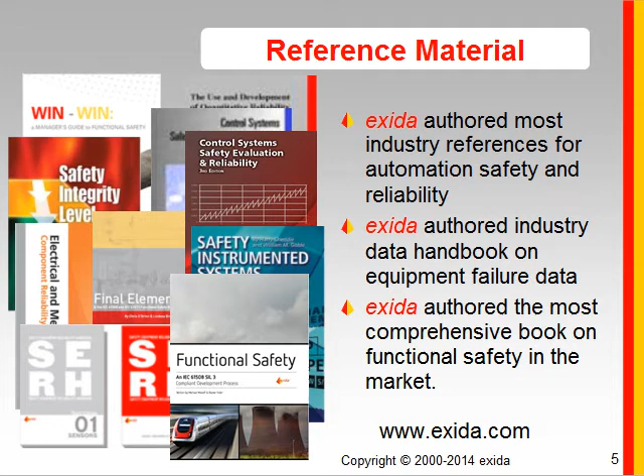I consider IEC 61508 and the process industry specific version, IEC 61511, to be tremendously valuable documents. They were written during the late 90s, to the best of my memory. I do remember attending committee meetings in the mid-90s through the late 90s. I remember attending many committee meetings in 1998, 1999, and the first versions of 61508 were published in 1998. The final versions in 2000, 61511 in 2003. These were tremendously valuable documents to all of us.

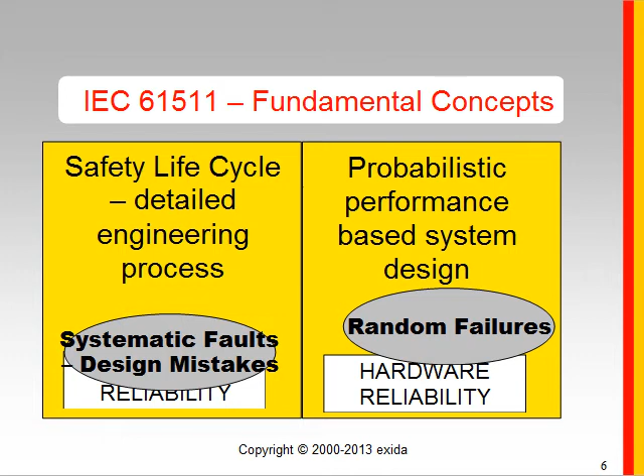These documents are founded on two fundamental principles. A safety life cycle, it's called, a detailed engineering process designed and created to eliminate or reduce design mistakes. A design mistake can cause a dangerous failure. These are called systematic faults. At the same time, we want to eliminate or reduce the chance of random failure, primarily hardware. And a probabilistic performance-based system design concept was adopted to make certain our designs are good enough for random failures. Different mechanisms protect us against systematic faults and failures. The standard deals with both of these fundamentally different kinds of problems, and it does an excellent job.

This safety life cycle at the systems level is a series of steps for the entire life cycle, from analysis through maintenance and decommissioning. The purpose is to reduce design mistakes, increase safety, and lastly, and most important perhaps, to management at least, optimize cost.

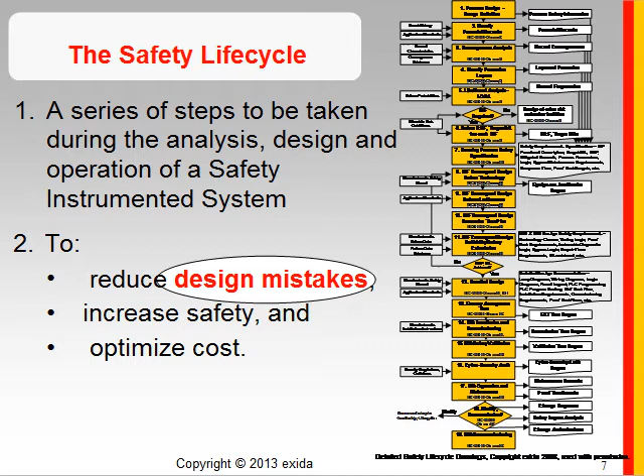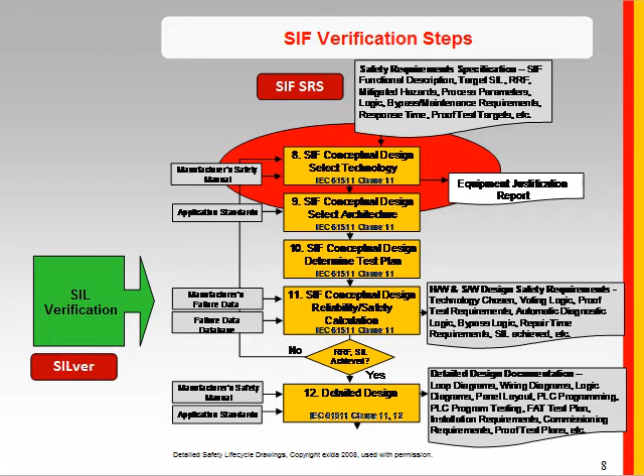Stay tuned. In the middle of the safety life cycle is a set of steps called SIF verification. And you, as a safety instrumented function designer, are free to design the system you want. But you must verify that your design meets the target SIL level. That's SIF verification. How do you do that? Well, there are 3 barriers.

You must make sure all of your equipment has sufficient design quality. That's barrier number 1. Sufficient design quality. Now, how in the world would you know if your equipment has sufficient design quality? That's a metric called systematic capability. And there are ways to do that, including auditing the design process and the testing and so forth. And that's the essence of what we're going to talk about today.

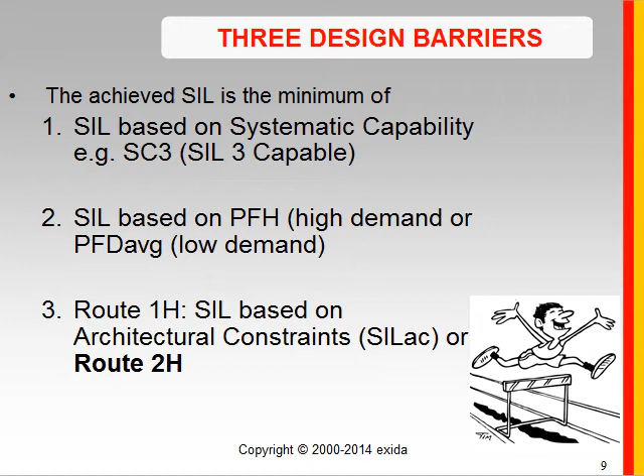Barrier number 2, we calculate probability of failure for the entire safety instrumented function. And barrier number 3, we look at specific architecture constraint limitations. And often minimum levels of redundancy are required based on barrier number 3. So we look at these 3 barriers, and a lot of people have spent a lot of time focusing on barrier number 2, calculating the PFD average or the PFH. Not as many people have spent much time worrying about barrier number 1 or barrier number 3, and we do have a web seminar on all 3 of these. Today we're going to focus on barrier number 1, systematic capability.

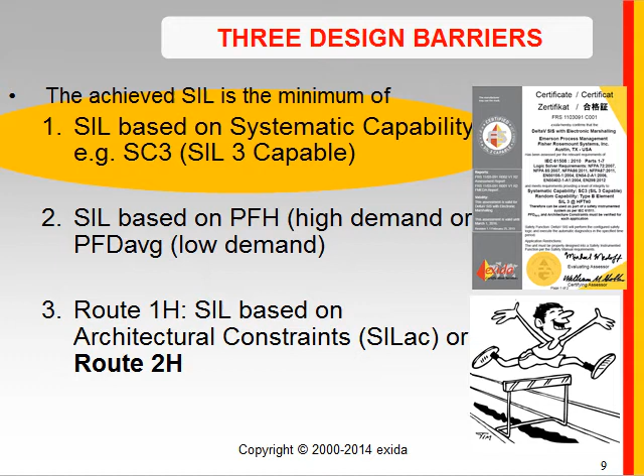One of the best ways, in fact, clearly the best way to evaluate systematic capability is to purchase equipment that has been evaluated for systematic capability by third-party accredited experts. And that is typically known as an IEC 61508 certification.

Systems, products, components, software, and even personnel are getting certified today. The certification varies as a function of the type of product involved, but assessments are done against a set of requirements based primarily on international standards, including primarily IEC 61508. Most certifications are done by a CB, a certification body. And the certification body should establish a scheme which lists all the requirements for certification, both those in a standard and those added beyond the standards.

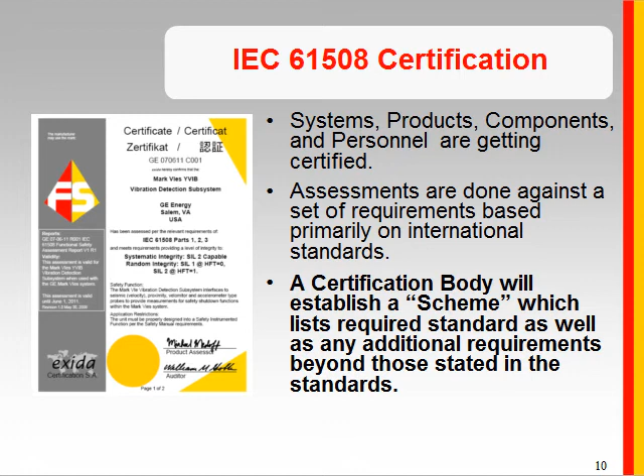Certification scheme. And the benefits of this: hardware. The actual hardware you will be purchasing is studied in detail to identify all possible dangerous failures. And in most cases, the design is changed or upgraded to eliminate or detect many of these dangerous failures. And failure rates are published as a function of failure mode to give you, at least in some certification bodies, really good quality data. And we'll be talking about that later.

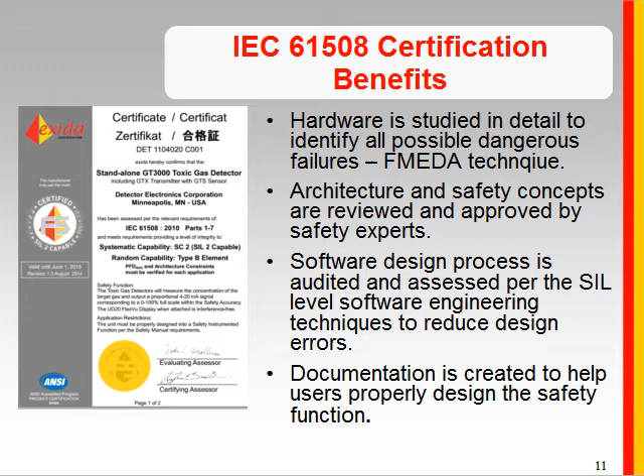The architecture and the safety concepts of each design are reviewed and approved by top safety experts. The software design process is audited and assessed per the SIL level software engineering techniques to reduce software design errors. And that's a tough one. And lastly, documentation is created to help those who purchase a product properly design that product into a safety function. These are all things that are of great value to the systems level designer. And all of these things, if there is sufficient quality and integrity, indicate systematic capability.

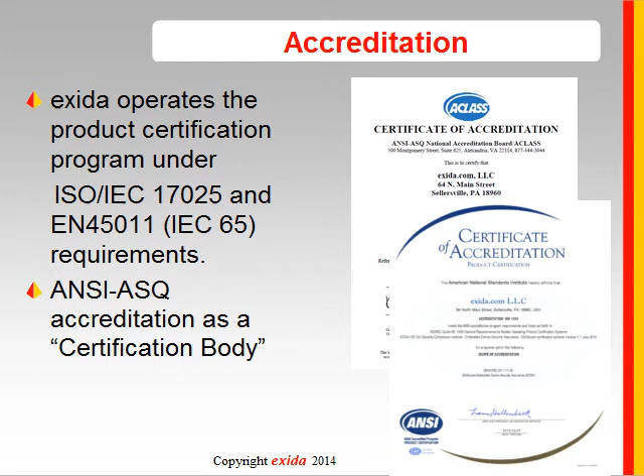It's important that those who evaluate systematic capability be audited and accredited, or in effect certified. A different word is used, accredited. In addition, I mean, who gives an organization the right to issue a certificate? Typically, that's an accreditation body. In the United States, where exida operates the certification program, the accreditation body is ANSI, the American National Standards Institute, and they will audit and accredit organizations, if they pass, to do certifications according to these highly technical standards.

Companies that have an accreditation should confirm the accreditation by putting the AB logo on every certificate. I will admit, exida only started doing that recently after someone commented that we weren't, but that is an important thing, and we'll make sure all our certificates are upgraded shortly.

I got a question. How often is the accreditation revalidated? The answer is every year. Although I'll have to say that it feels like the ANSI auditors are coming in every 6 months. And that's primarily because exida is expanding its scope of operations. We now do cybersecurity and automotive and machine safety. And so we end up having the auditors in here quite often. But at least once a year. Thanks for the question.

Look for the accreditation body logo on each certificate because it's important. Why? Some organizations, even though they are accredited, do not operate under the accredited procedures. I asked them once, why? That's too much work. Oh my goodness. I find that inconceivable. And so we call those a house certificate.

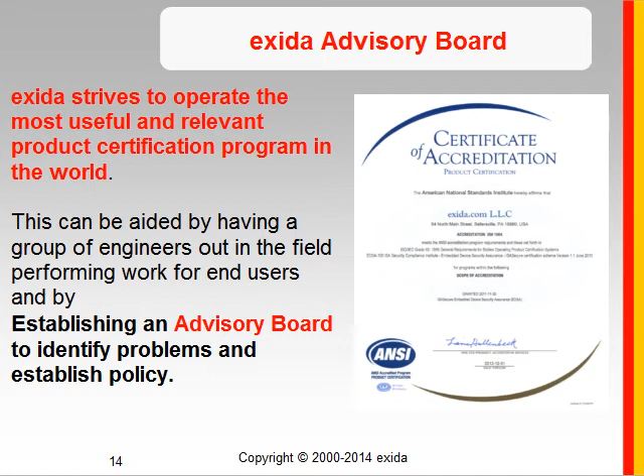Look for the accreditation body logo on the certificates. Every certification body should have an advisory board. This is a group of people who reviews the requirements, the operation, and problems in a certification body. exida has an advisory board, and we use them to help review the requirements we use, to add new requirements, and to deal with complaints and problems of a serious nature.

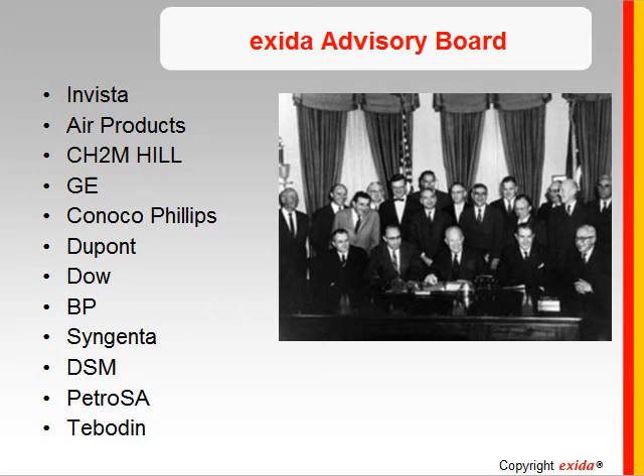Our advisory board is primarily made up of end users and manufacturers from the process industry and machine safety industries. We meet 3 times a year. We do every quarter except the summer. We take the summer off.

The advisory board has established a certification scheme for exida, which goes beyond IEC 61508. In other words, people from engineering companies, from process industries, and from product manufacturers said the world needs a tougher program. And what we've added beyond 61508 is a detailed FMEDA analysis. And I'll be talking a little bit about what this is because we think it's quite valuable.

We analyze and publish not only the dangerous failure rates, like some CBs do, but also the false trip data. I don't know about you, but I've been told by many in the process industries that a false trip is a really big deal. And it's just as important to analyze and evaluate false trip. It's not enough to just publish a PFD number. We must calculate and verify false trip as well. And it can be done. Those who say it can't be done simply don't know how to do it.

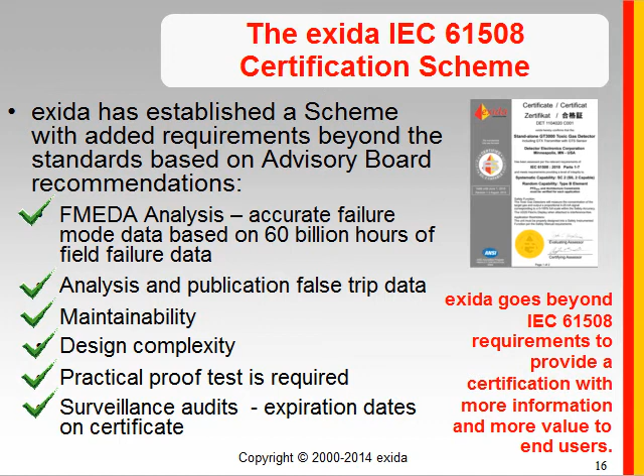We evaluate product maintainability. We evaluate design complexity. And the more complex the design, the deeper you dig in order to verify systematic capability. Exida demands that a practical proof test be created by the designer of a product, at least the outline for a proof test. There are many products on the market that are simply not proof testable, believe it or not. And Exida does surveillance audits and publishes expiration dates on our certificates. I will say that has been copied by other CBs since we started doing it, but that's a good form of compliment.

How's it work? Many pressure transmitters have now been certified by Exida certification. We review the detailed product development process, make sure it meets the required SIL level. We do an FMEDA analysis. Most of the time, that results in manufacturers adding features to the product to make sure data is properly protected in the memory, and adding features to detect program execution problems, and adding automatic diagnostics.

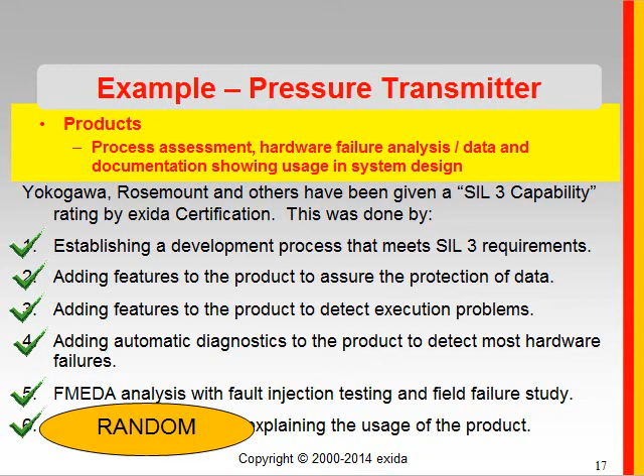What's the bottom line here? You get a much better product, a much safer product, and a product that, well, all indications are, has fewer design defects. And user manuals were created to make sure you have the information you need to properly design. We need to protect against random failures and systematic failures. Please do not hesitate to look at the Safety Automation Equipment list, where all of these certifications are published.

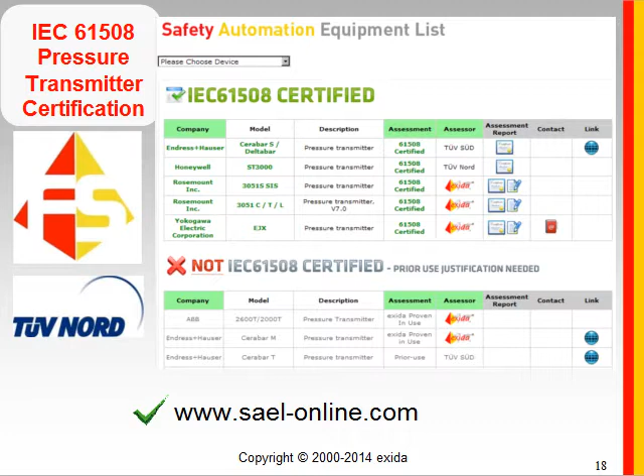The certification concept applies to simple mechanical devices as well, for example, a solenoid valve. We do something very similar. The IEC 61508 standard clearly applies. You establish a hardware development process that meets SIL 3 requirements. We demonstrate test results, make certain they are properly testing to verify the design was done properly. We make certain the user manual has all the information needed for safety design, and we do a detailed failure mode effect and diagnostic analysis. We cover both systematic and random failures.

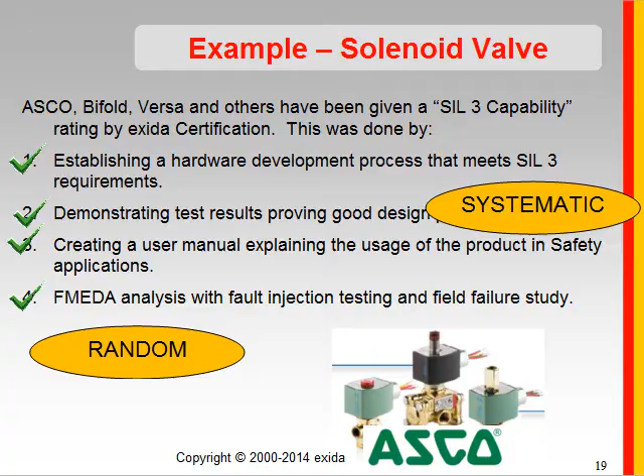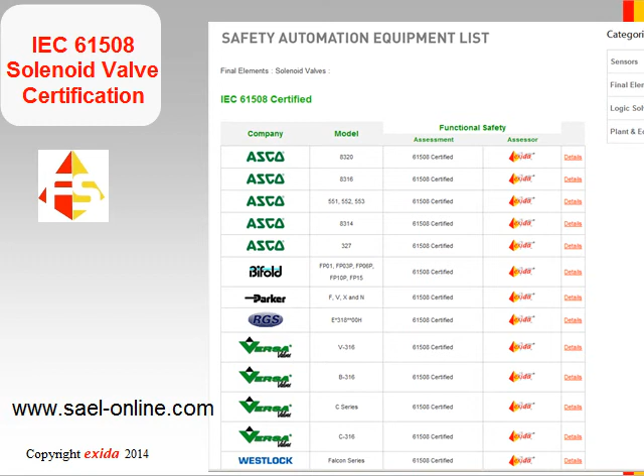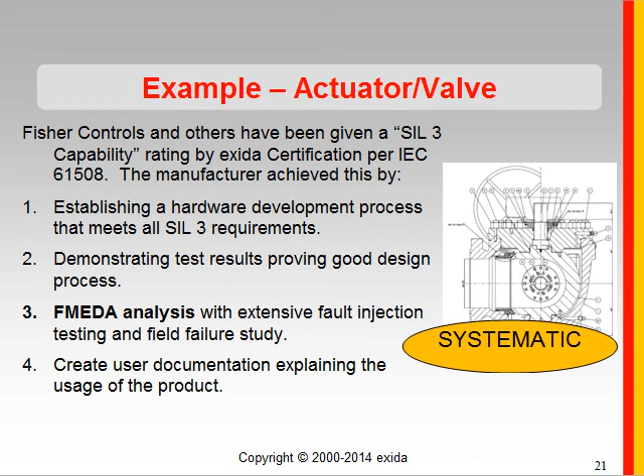And if you look on the Safety Automation Equipment list, which is on the Exida website, you will see a large number of manufacturers now have certified solenoid valves. Even more complicated mechanical devices like actuators and valves follow a similar process, covering both systematic and random failures. Of course, the whole certification process started with logic solvers.

I see a question popped up. This is a good one. Is there a motor interrupt function available with SIL certification? It is a question Exida has been asked before, and I'm so glad you are asking. At this moment, I do not know of any motor interrupt function, final element, a motor contactor, or, quote, motor controller that is SIL certified.

I will tell you that Exida has contacted several manufacturers, and they've all told us, end users don't want certified motor controllers, so we're not going to do it. I guess the bottom line is, if end users want certified motor interrupt controllers, you need to tell the manufacturers to get their products certified. Good luck. I'll be glad to help in any way I can. And if you have any names of people I should contact, please send them to me. And thanks very much for the question. It is relevant. It does seem to be a hole in the certification scheme.

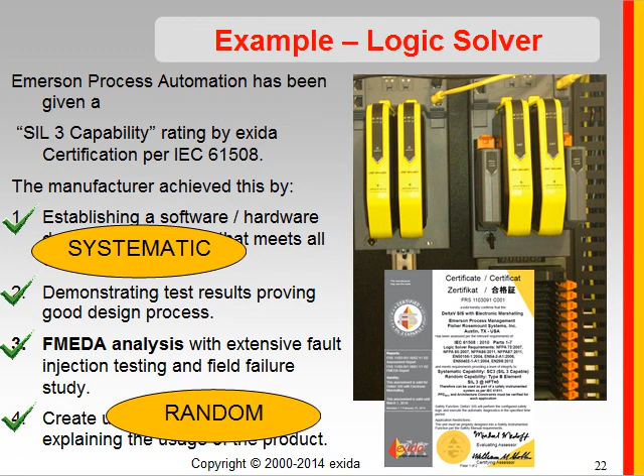We do FMEDA analysis with extensive fault injection testing to verify the diagnostics, and detailed field failure studies of the existing design or prior designs. And the logic solver manufacturers create good documentation, again, doing all that we can to protect against systematic and random failures. Manufacturers who get their products certified have to do a lot of things.

And we check. They have to have a documented life cycle for safety. That means detailed, documented procedures for how to design and test their products, including software. They have to have requirements, detailed written requirements. It's not enough to have it in the head of the chief designer. They need a detailed safety-related test validation plan, we call it. They have to have a defined architecture and design documents.

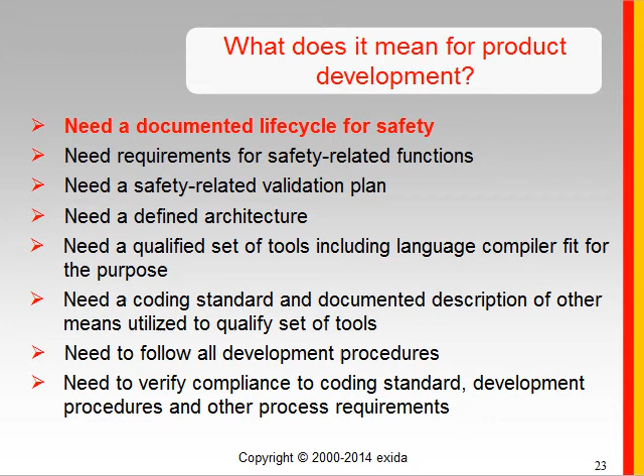They have to qualify their tools, even their mechanical design tools. I have so many stories about problems based on looking at thousands and thousands of field failures. Some of them are caused by the design tools. They have to have a software coding standard and documented descriptions of all the compilers and software development tools they use. They have to follow these development procedures and have evidence that they are really following their procedures. And they need to verify compliance to all their various coding standards and procedures.

At exida, we have a pretty extensive certification process, which is typically more detailed than others, because our advisory board wants a scheme that's tougher. The exida certification process has a lot of details in it. You can see we analyze the hardware, we analyze the software, we provide training to the people to make sure they understand how important safety is. We analyze communication protocols, and we create what's known as a safety case where we identify potential problems. You can look at all the evidence documents that we require.

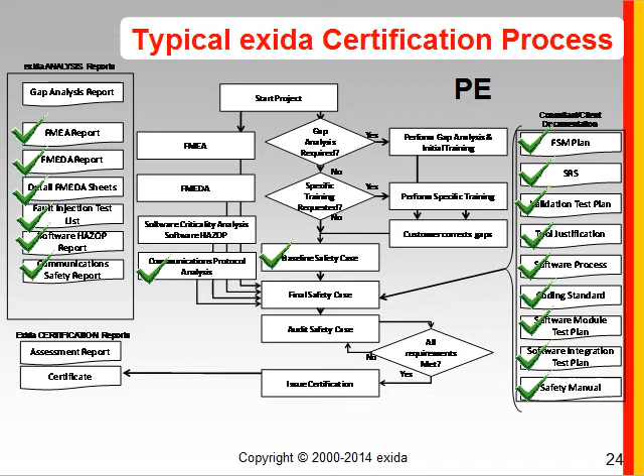Requirements, functional safety management plan, validation test plan, tool justification, software process documents, coding standards, module test plans, module integration plans, and a safety manual. We have to have a detailed failure mode and effects analysis, a detailed failure mode effect and diagnostic analysis, a fault injection test to make sure the FMEDA is validated, the software HAZOP report, and communication safety. These are all the things we need to really do a pretty good job on a smart product.

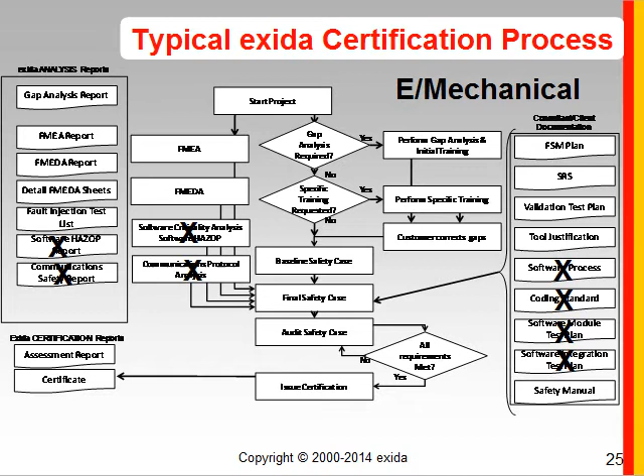Now, obviously, there are many things that are not as involved in simple type A or simple mechanical devices. There's no software in a solenoid valve, nor do we have to check for that. But everything else still applies. And that's how you establish systematic capability, even for a simple mechanical device.

More questions are welcomed at any time. Comments or challenges are also welcomed.

I talked about this FMEDA. It's a process developed by engineers at Exida. Using a component database, we look at each and every part. For example, what happens when this capacitor fails short circuit? What happens when this capacitor fails open circuit? What happens when the input circuit to this integrated circuit fails open, short, or leakage? What happens when this resistor drifts and changes value? We look at every single component and every failure mode of every component.

And you have to ask the question, how does this impact the product? Does the product fail? Does it fail safe? Does it fail dangerously? Is the failure detected by any automatic diagnostic? And that all has to be documented with thousands of lines in the analysis. The question was, are they considered random failures? All of the things I just talked about, these capacitors, resistors, and integrated circuits, are most certainly considered random failures. Most hardware failures, even resistor drift, will likely cause failure of a product. But that is a question we ask during the detailed failure mode and effect analysis. It's very detailed, it's very tedious, and quite frankly, it can be boring, but it's effective.

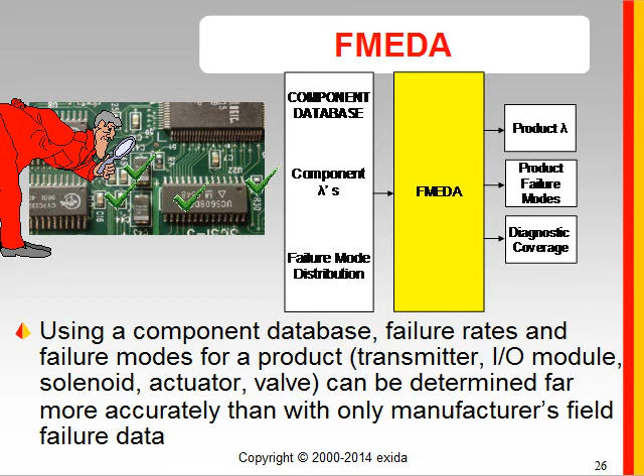And when we're all done, we generate both false trip failure rates and dangerous failure rates, and we can identify failures that are detected by automatic diagnostics and those that aren't. We also identify the useful life of the product based on the useful life of the components. There's unbelievably valuable information that comes out of an FMEDA. But like any method, there is a potential problem. The accuracy of the FMEDA depends on the accuracy of the component database. You've heard the term garbage in, garbage out. The FMEDA process itself is not foolproof and must have a good database.

Another question. Thank you, David. Systematic failure mode, looking at manufacturer's process. Yes, the process analysis is looking for systematic failures of the manufacturer. It's not just the process, the defined process, following the defined process, and testing. Testing is a big part of identifying and mitigating systematic failures in the manufacturer's development process. But the safety life cycle concept, and that translates to the procedures used to design and test a product, are what we look at to identify and, of course, require that manufacturers fix design systematic failures, design mistakes.

Well, if this component database is so important, how do you get a good component database? And the answer is, in any reliability engineering context, you must understand the parameters that affect and might create the failures of the components, and you must have good field failure data.

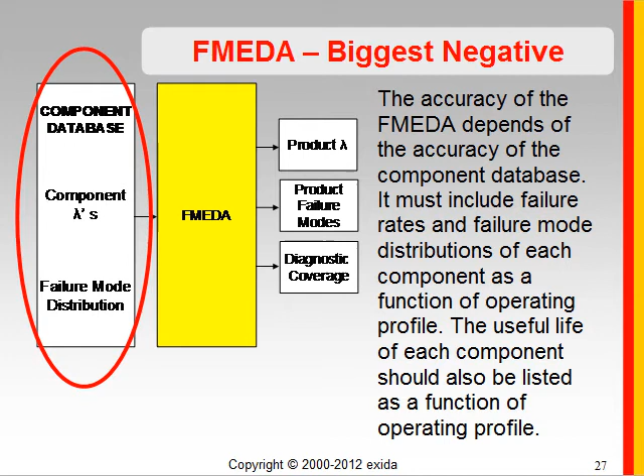At Exida, we've studied hundreds and hundreds of field failure sets of data from both end users and manufacturers. And at this point, we've accumulated history of over 100 billion unit operating hours. I have been to several conferences on data collection and analysis, and based on what I've heard at these conferences, I'm pretty confident Exida has more field failure rate data than anyone in the world.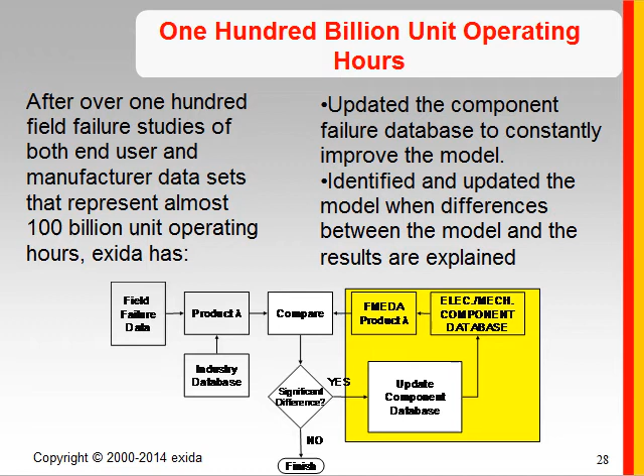We aggregate that data, we constantly compare the results against different databases, and we use the collection of many sets of failure data results to update the Exida component failure database. We published that database, and we received comments and feedback from experts all over the world. Some of the feedback we get is that some failure rate numbers being published are, quote, wildly optimistic. And what do we do when we see these wildly optimistic numbers?

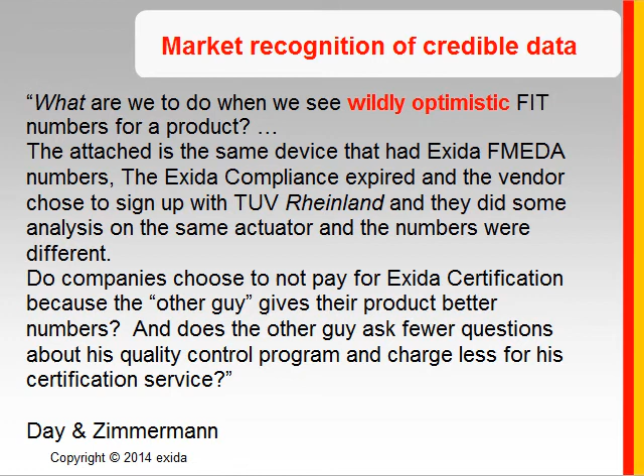One particular engineer wrote us an email that said, I have attached the Exida FMEDA numbers for this X product. Exida certified the product, but I see the Exida certification has expired. And the vendor chose to sign up with a TÜV agency, and they published numbers on the same product, and they were 40 times lower. This is not good. So you have to be very careful about where the failure rate data comes from.

How do you do that? Well, at Exida, we constantly compare. Constantly compare. Here's one of those results. We took some FMEDA results for a simple solenoid valve and a spool type solenoid valve, and we compared it to the field failure results published by Dow. And the fact is, the Dow number, represented by this gray dot, is right in the middle of the Exida numbers.

Exida engineers traveled to Dow on several occasions and reviewed their data analysis method with them, and they explained that they combine all different kinds of solenoid valves into one number. Take the average of the Exida numbers, and it kind of matches the Dow number right on the money. That's a really good match.

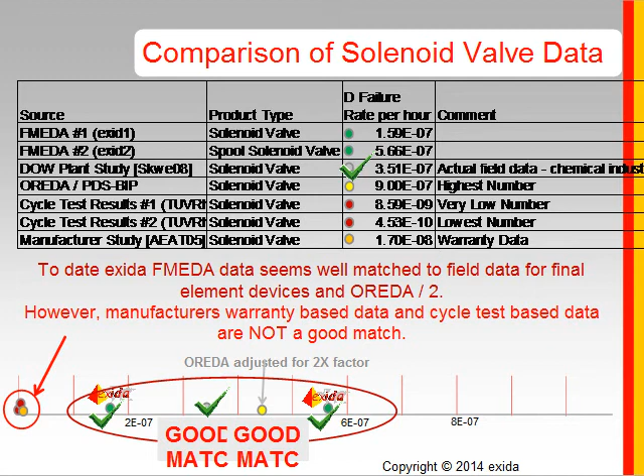OREDA numbers are sitting at a higher rate, but we also traveled to a technical conference in Norway and discovered OREDA includes what we call site-specific failures, and roughly the site-specific failures represent half. So if I take the OREDA number, divide by 2, it also matches with the Exida FMEDA, which includes the product failure rate numbers. However, some of the manufacturer's warranty data and cycle test results create numbers that are extremely optimistic, so you have to be very careful about those, even though they're published by a certification body.

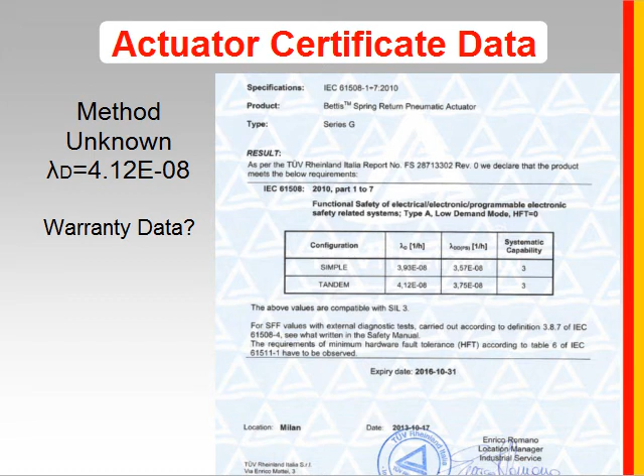Here's a copy of a certificate with an unknown data method for a Scotch yoke spring return pneumatic actuator. And they've got the dangerous failure rate at roughly 3.5e-8. And we sat down and compared that. When you add the numbers up, 4.12e-8 is the dangerous failure rate. Exida FMEDAs are coming in at between 4.29e-7 and 6.

You know, the Exida numbers are about 10 times higher. Oh, this is not good. Why is that? Well, where's the Dow number? 2e-7. All right, Exida seems to be a little pessimistic compared to the Dow. The NAMUR number is a pretty good match with Exida. The OREDA number, if we divide by 2, is almost a perfect match to the Exida numbers. If anything, the Exida numbers are a little high.

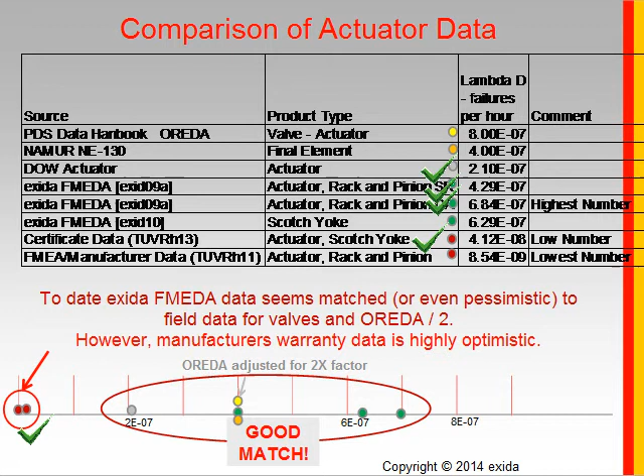But some of these numbers, apparently based on manufacturer's warranty data, these are way, way optimistic. Now, the problem with that is if you use these kind of numbers, you'll be designing dangerously.

Oh, I see another question. Sorry, I might have missed it. The question is, how does the component database used in the Electrical and Mechanical Handbook compare with field failure results? That's exactly what we're doing right now. Thank you so much for asking that question.

The Electrical and Mechanical Component Handbook is used to generate the FMEDAs. So these numbers, 4.83 and 1.35e-6, represent the numbers from the component handbook. Third edition is the latest. We'll be publishing a fourth edition this fall. And we've gathered up another few billion hours of field failure data since the last book was published.

These numbers that come from the Electrical and Mechanical Handbook match up pretty nicely with Dow, and match up pretty nicely with OREDA divided by 2, and match up pretty nicely with NAMUR. And this gives one confidence that the numbers in the component handbook are finally getting there.

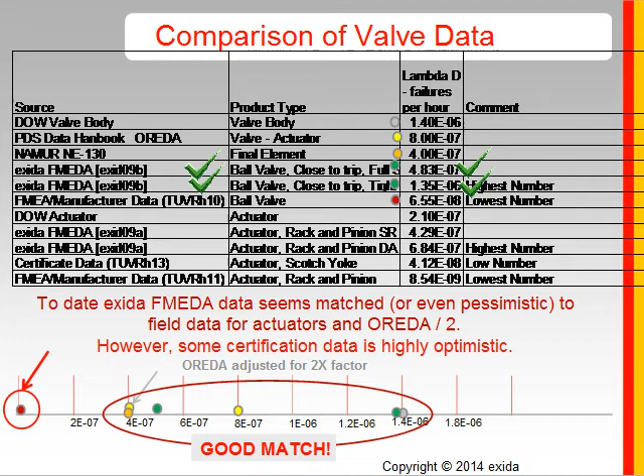We're very comfortable with the failure rate numbers we are publishing now. And it does remind me that an FMEDA really needs to be kept up to date based on manufacturer's design changes and new failure data information. And so make sure your FMEDA data is no older than 3 years. That's the rule I use.

Completeness is an important part of systematic capability, and Exida uses a safety case concept for that. All the requirements are listed in a document for every single requirement in the Exida scheme, including those from 61508 and the additional requirements Exida has imposed based on our advisory board. We write down an argument how a particular design meets the requirement. Every argument must be backed up by evidence, a process document, a test procedure, field failure history, fault injection test results.

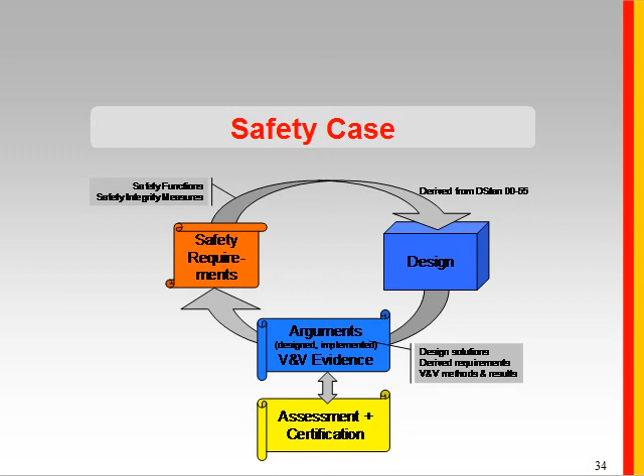So we analyze. We do bench analysis. We do testing. We evaluate the design process and the manufacturer's testing and the field failure rates of either the existing equipment or prior generations. And all of that is put together in a package called a safety case. I remember reading a paper about this written out of the United Kingdom. To the best of my knowledge, that's where the safety case concept was created. And it's a valuable concept to ensure thorough, complete assessment.

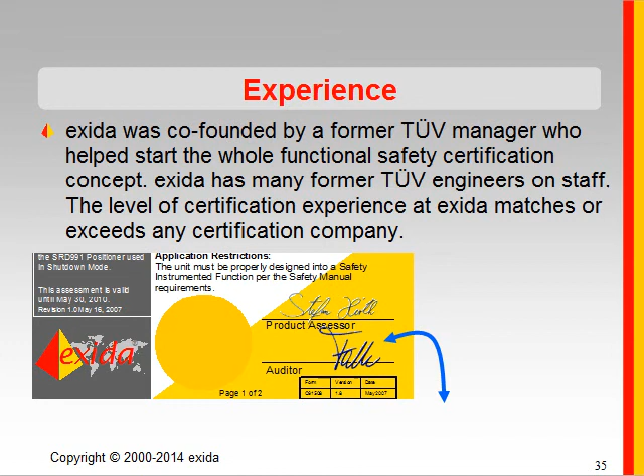I'm happy that Exida has so much experience in the certification business. Exida was co-founded by a former TUV manager who helped start the entire functional safety program concept. And we have many former TUV engineers on our staff. Many of the top people joined Exida when we started up in our early years, and we've used that experience to build what we think is the strongest program in the world. We're active on the committees for both cybersecurity and for functional safety, and we helped develop and write many of the standards.

Another question. Thank you so much. If I have a SIF, which is SIL 1, but my sensor is not certified, what do I do? Well, that's a good question. First of all, I recommend you go ask the sensor manufacturer if they're in the process of getting a certification. I can tell you that exida has 64 active certification projects going on right now. Now, not all of these people will succeed. Some of them fail. 61508 certification is not easy, although I will admit SIL 1 is much easier than SIL 2, which is easier than SIL 3.

But if they're about to get the product certified, that's good. If they're not, your choice is get a certified product, or as a more practical matter, you can do your own prior use justification. That is a provision in 61511. It's absolutely allowed. In effect, you are taking the responsibility to evaluate the systematic capability of your sensor. And if you have the means and the ability to do that, it usually involves manufacturer quality audits, and we have a whole web seminar on how to do that. So stay tuned. I could probably get that scheduled even earlier. The answer to your question, what do I do? You have to do your own prior use justification.

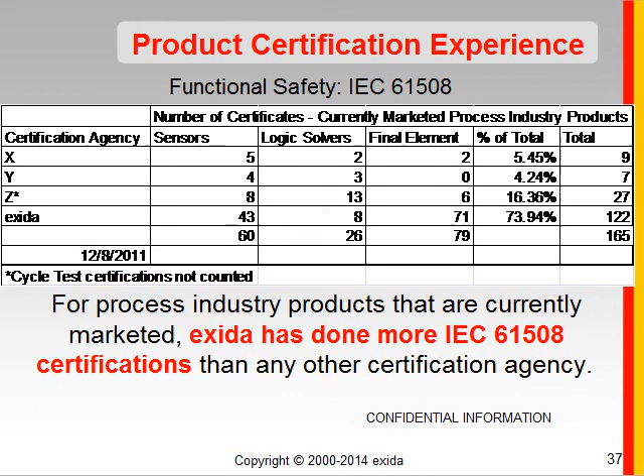So I have seen the new version of 61511, and they've done a better job defining what it takes for prior use justification. There's also an Exida web seminar on the subject, and I've seen documents from various government and regulatory agencies from around the world with their particular requirements. As we move forward, I would hope the standards do a better and better job defining exactly what that takes. Thanks for asking. All right, I hope you see the benefits of the certification, and obviously I hope you get some insight into the Exida certification program. If you have any questions or comments, don't hesitate to ask.

Oh, another one. Thank you so much. In regard to architecture constraints, I've seen many SIL-3 applications that use 2 out of 3 sensors with appropriate logic solver and 2 valves, on a 2 out of 2D and 2 valves on an ASCO 2 out of 2D. Can they meet architecture constraints, in particular the final element design? I didn't get enough information here to really answer your question, but it sounds like you have a design with a hardware fault tolerance of 1, assuming the 2 valves are piped up so that only 1 valve has to work to implement the safety function.

On the ASCO 2 out of 2D, I assume you have 1 per valve, and of course that does a fine job on exercising the valve, which actually lowers some of the dangerous failure rates, and does a good job at detecting when a valve has failed dangerously. And in a situation where 2 valves exist, that's a complete HFT equals 1 design, and so it would meet many of the architecture constraint tables, especially the new one from 61508-2010 called Route 2H, which I think is the most practical and useful table of all.